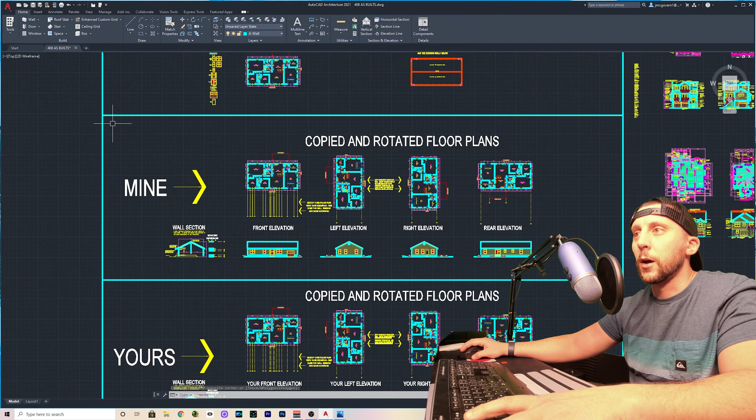All right, so if you guys want to use this file, it's in the link description. What I'm going to do is move all my stuff out. So I'm just going to select all this stuff, hit enter, click anywhere, and move it all the way out here. I could delete it, but I like to steal stuff from it.

For example, and by the way, I'm doing this in AutoCAD Architecture 2021, but you could be in AutoCAD 2021, any year, or AutoCAD Architecture any year, but I'm in 2021. There are a couple differences between 21 and like 20 and anything newer, so as I'm going along, I will talk about that.

But what I meant to say is you don't need to be in AutoCAD Architecture, you could do this in AutoCAD. You just won't have the walls, windows, and door tool. But you can use lines for this stuff, and I'll explain a little bit of that as I'm going on as well.

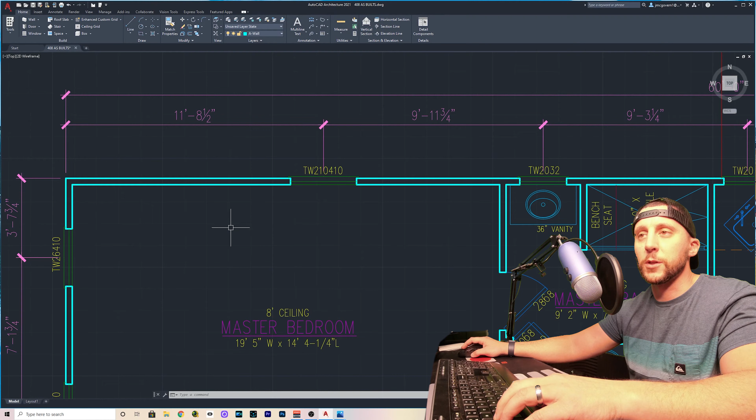So if you're in AutoCAD Architecture, you're going to select any other wall that's in my file, or if you don't have my file, you could just use the wall tool, and you can change the thickness of the wall to be 3.5 inches, because that's the true size of a 2x4. But I'm going to select one of my walls, and I'm going to do add selected.

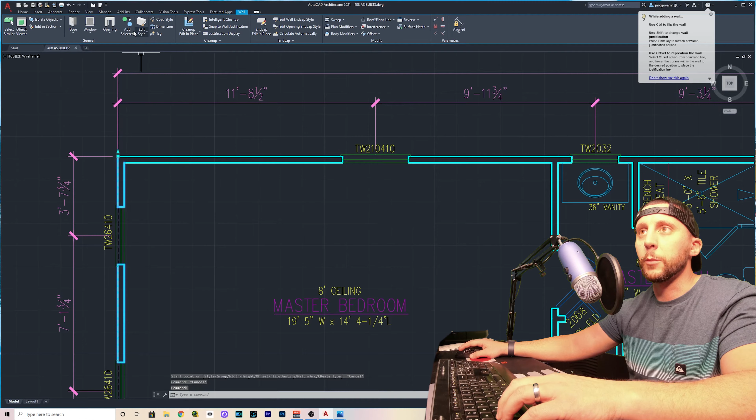With drawing walls, I want to talk about something I've talked about in other videos, but just in case someone new is coming into this, I want to explain this real quick. You can see on my cursor it says justify left, and what that means is that when I click down on the wall, the justification corner being left, if I'm drawing clockwise, is what I want.

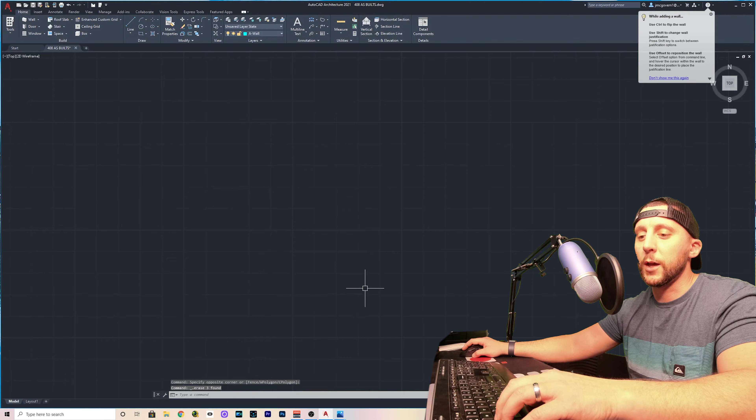If you're drawing counterclockwise, then you want to change the justification to right. The way that you change it is by hitting shift. Let me do that again real quick.

Let me grab a wall. I'm actually going to copy it over so I don't have to keep going back over. All right, so now if you click a wall and do add selected, I'm on left because I like to work around this way.

Whether you're doing my project or your own, you're going to type the distance of how far each bump in and out was on your house. So if you're creating your own plans, you might have 20 feet across, then 10 feet in, then 15 feet out, and 10 feet over.

You want to do those all clockwise, using a left justification. If you do counterclockwise, do right justification. So if I hit shift, it goes to center. Center is worthless. If I hit shift again, it goes to right. So make sure that you're on left if you're following the way that I'm doing it.

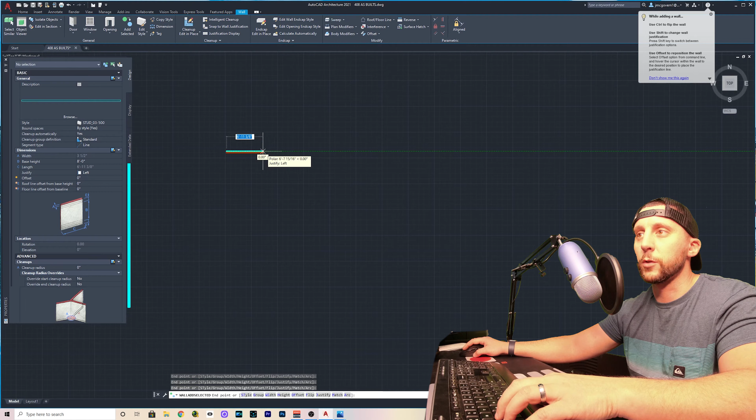Looking at my plan, I'm going to put this up in the video right now as well, but I'll also flash it up every once in a while as I'm looking at stuff.

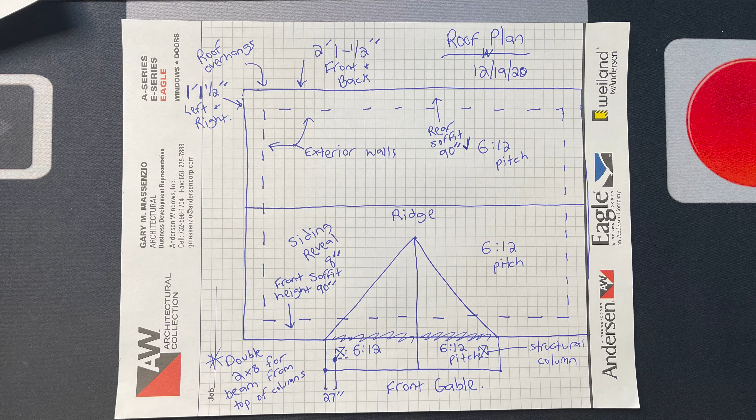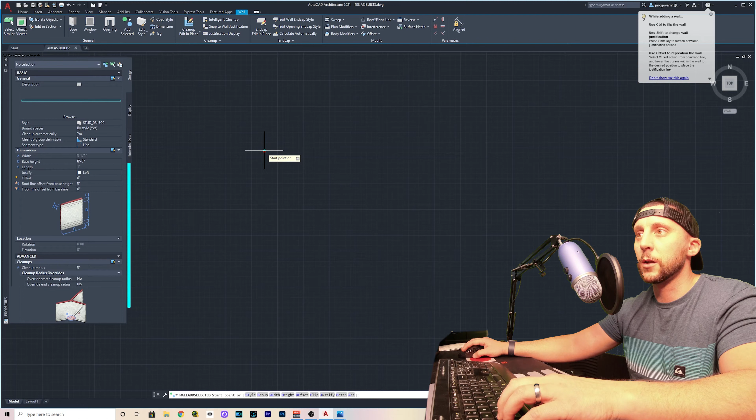So with the wall tool selected, with the wall selected and add selected, you can click down and you're going to go 54 feet, and you put an apostrophe there for feet. And then you're going to go down and we're going to do 26 feet 1.

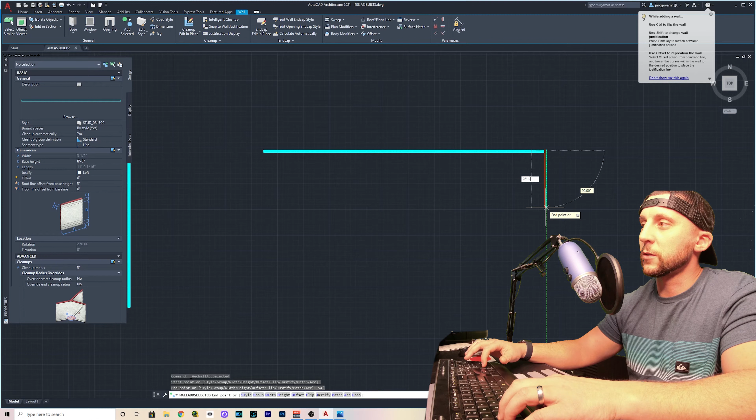Now, if you had a mixed number, like it was 26 feet 1 and 1/2, you would, every time you say the word 'and', put a minus sign. So 26 feet 1 and 1/2 would be 26 feet 1 dash 1/2 inches. But for me, it's just 26 feet 1, enter.

And then we're going to go back this way, 54 feet. And then we're going to do C, enter, for close.

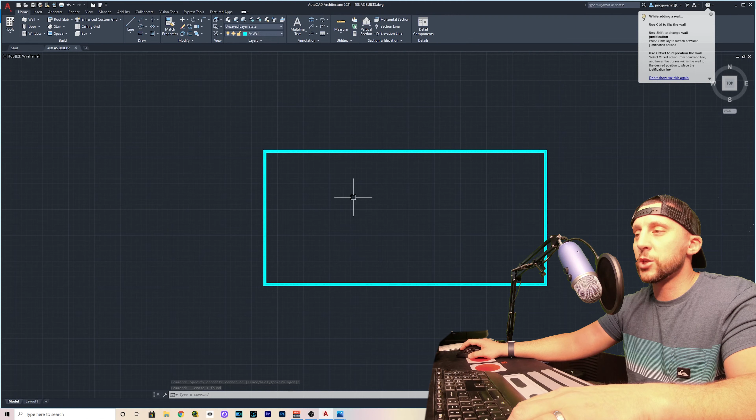Okay, now I can get rid of this wall. I'm not going to do any doors, any windows, any rooms, any kitchen or anything like that in this video. We're just going to do the exterior stuff that we measured.

If you didn't see part 1, I'm going to put a link in my description. You should really watch that first, because that was about how to actually measure your house and what to write down and what to look out for, and the general process of doing the exterior measurements of a house. Now we're just drawing up the exterior of the house before the next video where we measure the interior. And then after that, we'll draw up the interior of the house.

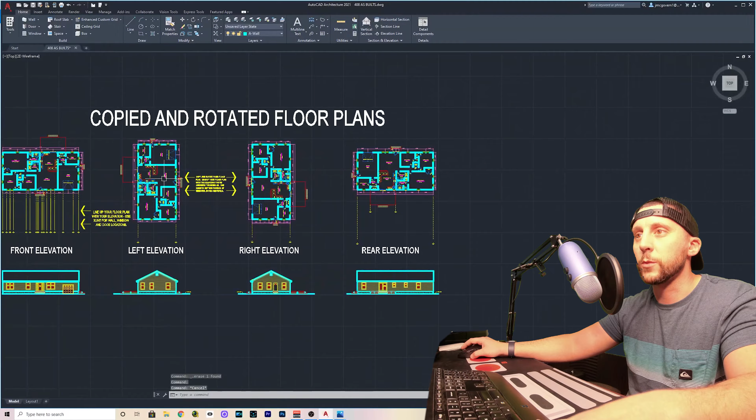Okay, so we're doing floor plans only right now. All right, so the next thing you're going to do is go over to one of these other ones again, and just grab something that's yellow, although that one's upside down. So let's go over here, grab something that's yellow, because that's my note layer. The reason why they all have different colors is because they're all on different layers.

Right now you can see I'm on the wall layer, and I have a lot of layers. A lot of these don't matter for any reason, but we want to be on the yellow layer here, the A text layer. So now you could go into this list and just click on A text, or you could use the tool called Make Objects Layer Current. So if you click on that, you can just click on yellow, and it's going to kick you into that layer.

Everything that I note up, that's like here's where the AC is, here's where the electricity comes into the house. Anything that you're drawing up that's just a note is going to be in yellow. Okay, so here's what we're going to do.

We're going to start, and I realized that on my plan here, I have this backwards. My text is drawn this way so I could read it, but I really want the garage door to face down in my AutoCAD drawing, which will help later when we do elevations. So I could rotate this, but then it's going to be hard to read the text.

In the bottom right corner of AutoCAD, I'm going to do 3 feet 4.5 inches to get to the center of the natural gas.

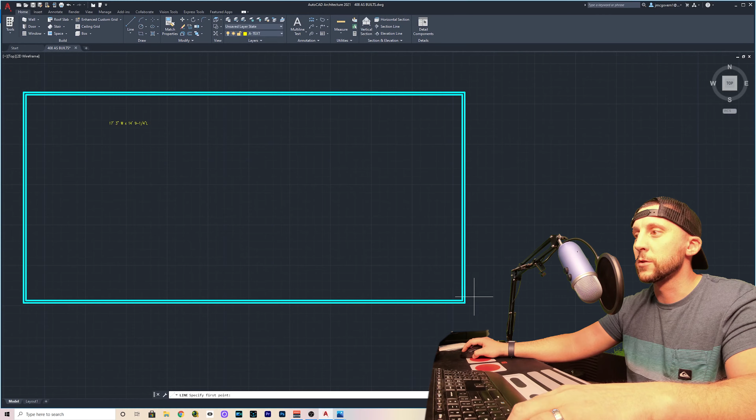You got a couple options here. You could draw a line, let's go like 12. Then you could take this and do M, enter, grab it at the end point, and move it in by 3 feet 4.5 inches, and hit enter. Let's double check that measurement, 3 feet 4.5, good. That's the middle of the natural gas.

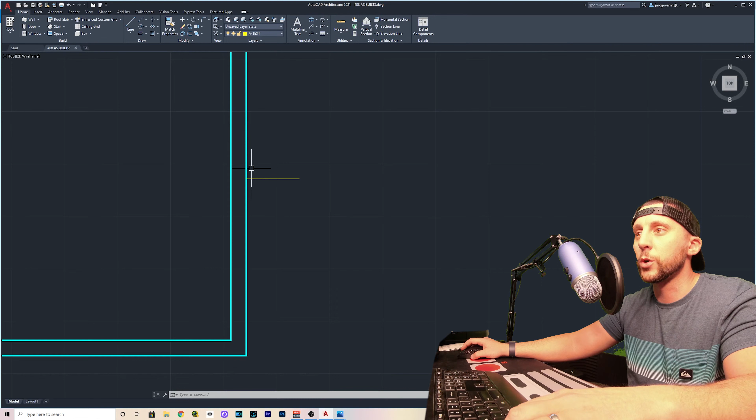Now we're not going to draw a block of natural gas or something that looks like a natural gas inlet. We're just going to put a little box here and label it natural gas.

So do an offset, 6 inches. If you're in the web app doing this, which is a lot more difficult especially for a project of this size, when you do offset you're actually going to click the line first, then go in the direction you want, type your distance, then hit enter. If you're in AutoCAD software, it's just offset, type the distance, hit enter, then move in the direction you want and click it down in that direction.

So I'm going to make this 12 by 12, and I'm going to get rid of my middle line. All I did there was take a line at the end and connect from here to here.

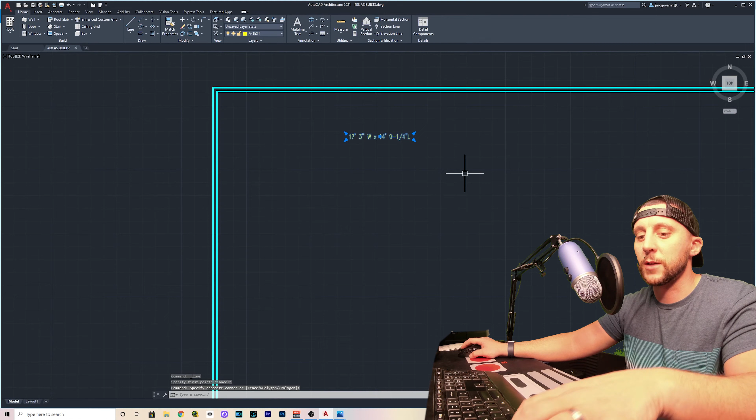Now with my text, this text size is already a good size, so I'm just going to double click in that text. I just copied that one - I did C, enter, click down, then moved it, click down for the base point and moved it over. But I'm going to change this to say natural gas, all caps. Then I'm going to click off.

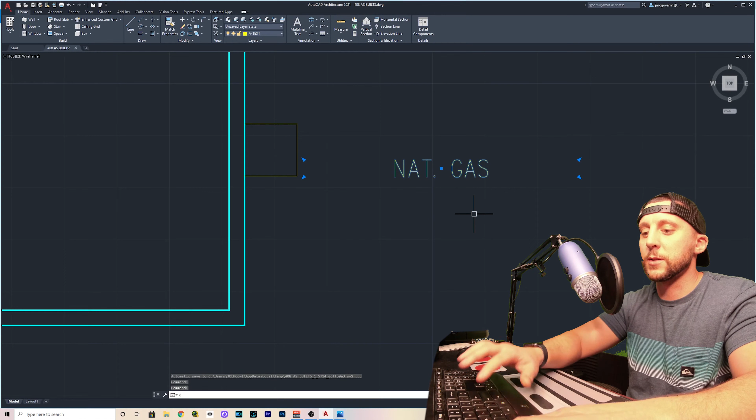I'm going to click it again and type rotate. Then it's asking to specify the base point. You can click anywhere in here and move your cursor up, or you could type 90 and hit enter. Then I'm just going to do M, enter, and click anywhere and move that right by there. I also like to put a little X in there saying, hey, there's something here.

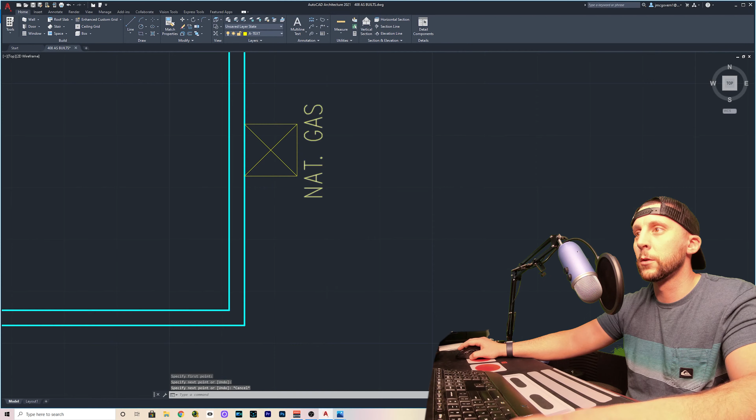All right, so that's the first one. The next one is going to be the electrical panel, and we're going to do the same thing - a 12 by 12 box. Then we're going to do the same thing for the cable lines, which is just going to be a 12 by 12 box.

Now these things are not that size, especially the cable lines going into the house, but it's easier to read on a plan, because you have to remember, if this was printed out at the correct scale, it's going to be on a 24 by 36 piece of paper, and we want it to be big enough to see.

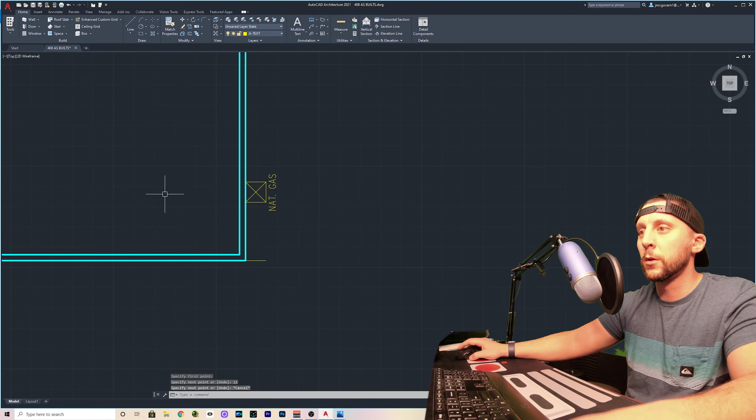So here we go, we got 21 feet 1.5. I'm going to go like this again and just do 12. Then I'm going to take this and do M, enter, and go to the end point and move up 21 feet 1.5 - I think it was 1.5. Did I make that up? 21 feet 1.5, yeah. My brain is a little foggy today, so you guys got to be patient with me.

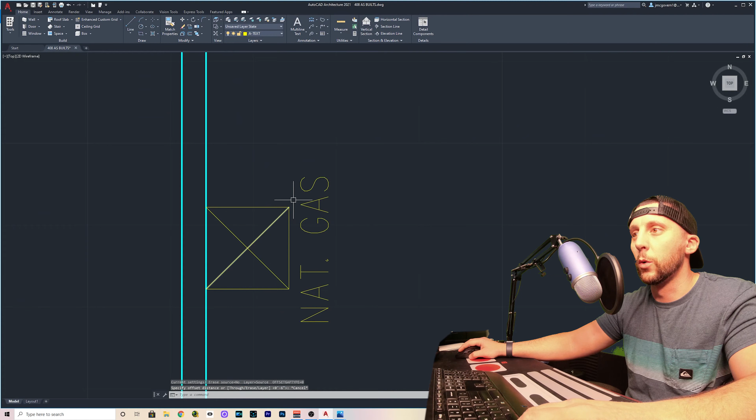Then same thing - we could do the offsets and build all that stuff again, or we could just steal this one, copy it from here at that midpoint, go down on the midpoint, then erase the line. All right, so we got that one. We could have copied this text all in the same shot too, but we'll do it again. Control C is copy, Control V is paste.

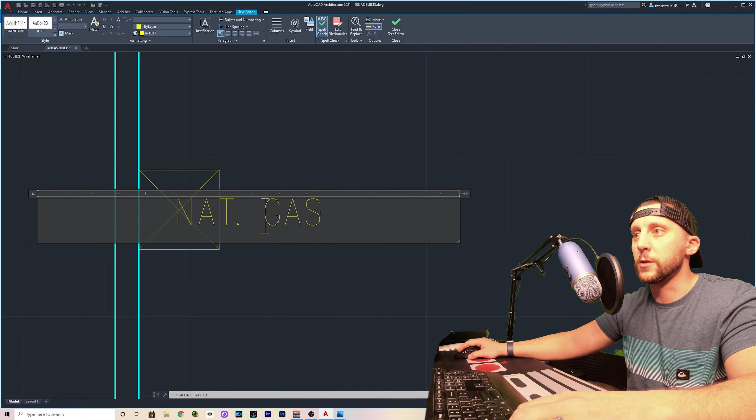By the way, I'm just zooming in and out with the scroller. Wherever your cursor is, that's where it's going to zoom in and out to. Double click on the text, change that to say electric.

All right, now same thing again. I'm going to draw another line out, and it's going to be 12, enter. And then I'm going to move this. Now my measurement on my paper is actually wrong. Well, it's not wrong, they're right next to each other, but they're almost too close to each other.

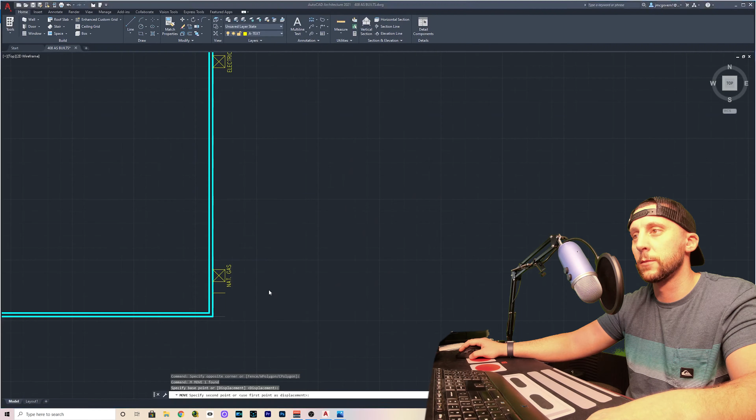So let's see what this looks like when I draw it out. It's supposed to be 22 feet 6. Now you can see how close they are to each other. And if they're touching each other, I'm just going to slide it over by a couple inches. It really doesn't matter, it's just got to be close.

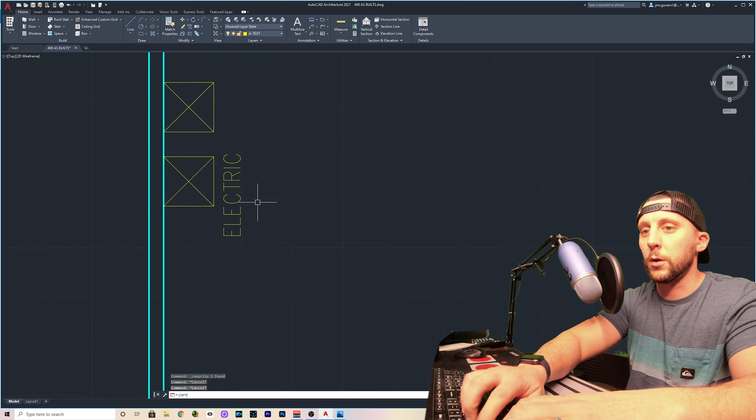Copy, midpoint. That's actually fine right where it is, I'm okay with that. All right, I thought they were going to be on top of each other. This one, I'll just move that down a little bit. And then this one, I'm going to do copy, click the text, hit enter, click down, and then slide that, make that say cable. All right, so we're good there.

That side's done. The back side of the house has the AC, and then it's got a patio. There is a pool and a shed, but I'm not going to do that on this plan because honestly, it's just drawing a big circle wherever the center of the pool is, and it's drawing another box with walls just like we did with the house. So I don't think it's really that valuable to show in a video.

And I'm going to get rid of this too. And then in the front of the house, we got to do the where the poles are, the columns. And I think that's going to be it for the video. I'm sorry, we're going to do a roof plan too, which is pretty easy to do.

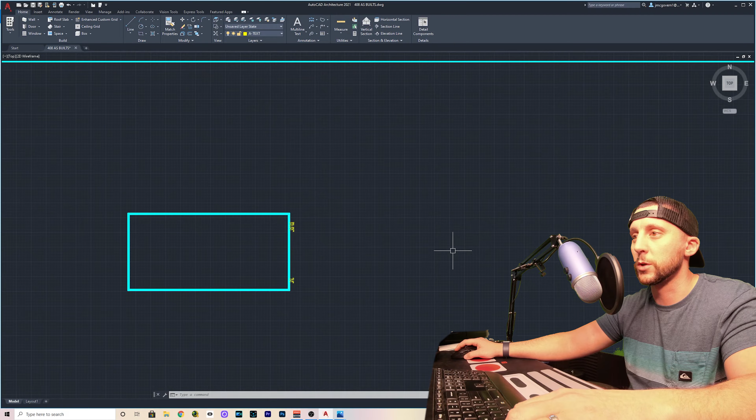So here we go with the AC, okay? I'm going to draw, this time I'm going to do 24 inches because the AC is a little bit bigger than those other things. The AC, whoops, wrong plan. The AC is 3 feet 9 from the corner to the center.

Now remember, when I was measuring all this stuff, I already took off 2.5 inches for any time I measured from a corner of the siding. If I measured from corner to corner, I took off 5 inches because 2.5 on both sides. That's because the siding overhangs the walls by a couple inches. It actually overhangs on my house by 2.5 inches. So I already did all that math on here. So all these numbers are good to go, which means that I'm going to go 3 feet 9 over.

Move, enter, click on this point, slide it over. We're going to go 3 feet 9, enter. And then we're going to do our offsets. And this one we're going to make 24 by 24. And then we're going to move it away from the house a little bit. So 12 this way, 12 that way. Connect the line, get rid of this line.

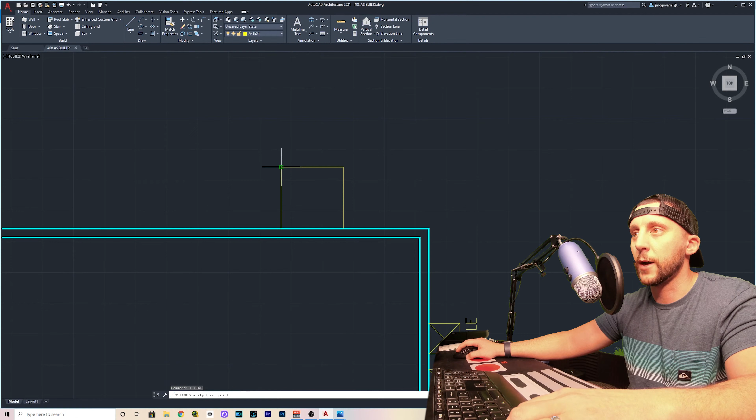L, enter is line if you want to do it faster. Corner to corner. Space, space. Space gets me out of it. Space gets me back into it. Corner to corner, and then we're going to just take this, move it up by about 4 inches, connect the bottom, take our text.

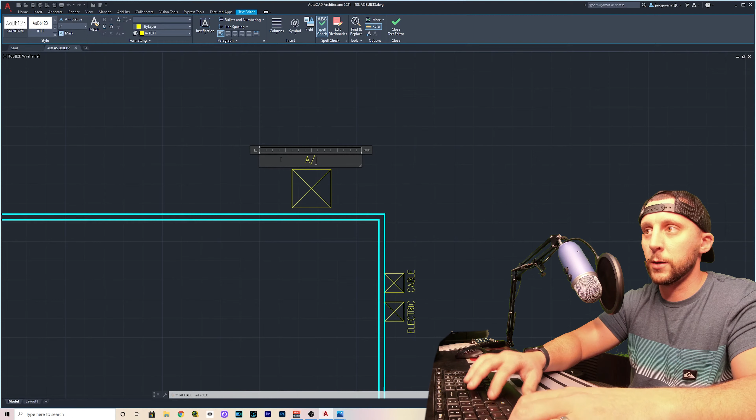I just did a Control C, a Control V, rotate, click down. You can just move your cursor down in the down direction and click, put that where you want it, double click A/C. All right, so that part's done.

So that's all the things I'm going to note up in yellow on the outside. The next thing I'm going to do is going to be the patio in the back, okay? From the back right corner, okay? Actually, in the AutoCAD, it's going to be the back left corner.

It's going to be 23 feet 10 to where it starts. All right, so what I'm going to do is go over to my other plan here and click on this deck.

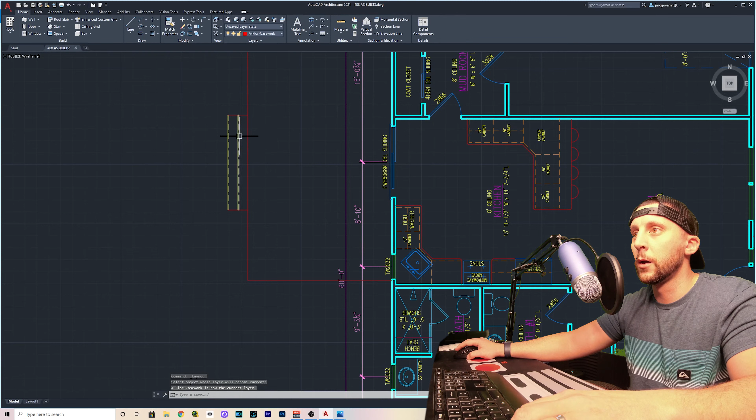Before I do that, I'm going to make objects layer current again. Click on the deck. I don't have any stairs on my house, but if you do, you can click on these lines for the actual steps. One shows the box of the step, the other shows the overhang of the step. The measurements I told you to take were these lines. When you're done putting those lines in for how big the tread is, offset 1 inch to the side, and that'll give you the overhang.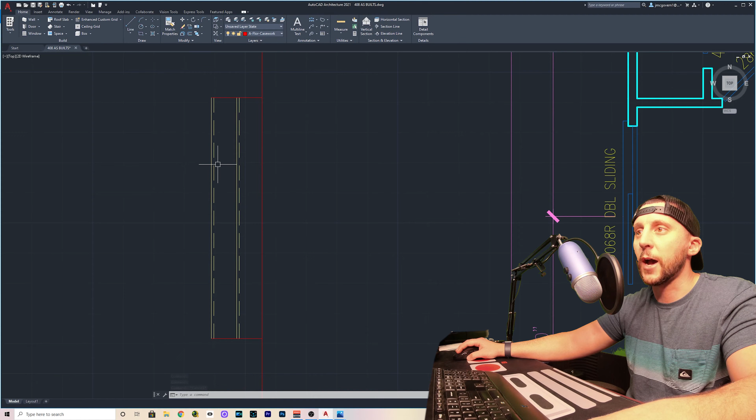For me, I'm on A floor casework now, which is the layer I should just rename to decks and patio, but whatever, I use it for other stuff too, so it's not a big deal. Now I'm on my red layer, and I'm going to do another line here.

Make sure you zoom in because you don't want to get the wrong corner here. I'm going to draw this out 12 feet because that's how far out from the house my patio slab is. Then I'm going to select it, move, grab this point, and move over 23 feet 10. By the way, if you want to know how to shift between windows like that, it's Alt-Tab.

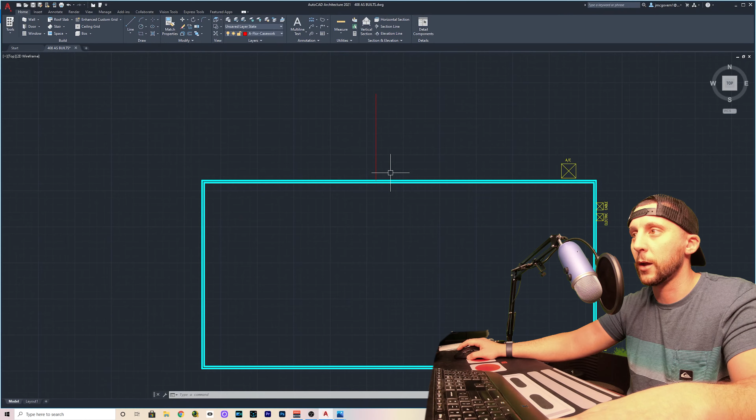I know a lot of people already know that, but some people don't. Alt-Tab just brings you back to the most recent thing you had open. It's a lot faster when you're doing work like this.

Next, off of this, I'm going to draw a line 24 feet because that's how big the patio is. Then I'm going to draw a line and close right there. I'm not going to put an X here, but I am going to label this as a patio.

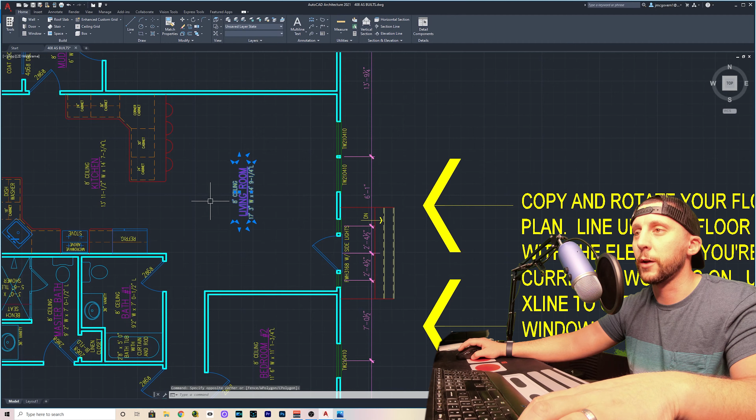I guess I don't have that label on there, so I'm going to steal one of these labels. Just grab those with a green box. By the way, left is green, that selects everything it's touching. Right is blue, that selects only things fully inside of it. So go to the left with a green box, Control C, escape, go back over.

I'm also panning by holding down the scroller on the mouse. If you hold that down and move the mouse, it lets you pan. But there are other ways to pan too, you can just type it. Control V is paste, slap that on there. Take this stuff, type rotate.

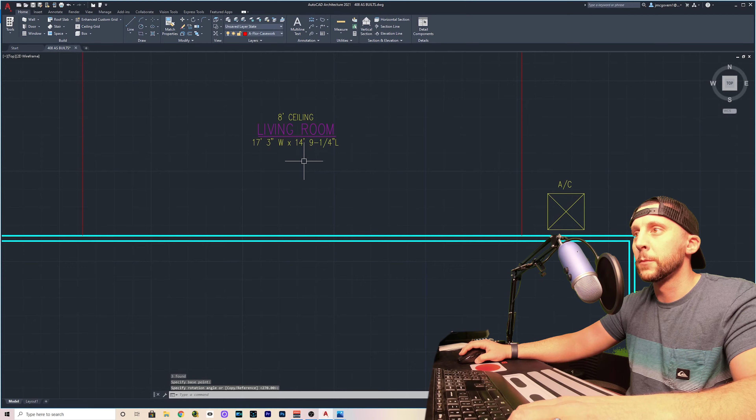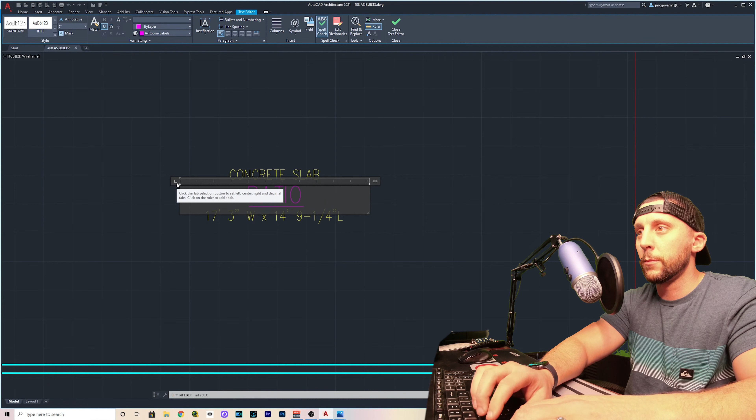Actually, I'm going to double click on this and say concrete slab, just describing what it is. This is going to say... oh, I'm sorry, I'm mixing this up. Let's put patio slab, and then on this one you're just going to say the material, concrete. Now we're going to do the size.

All right, so this is going to be 24 feet wide and 12 feet long, and then click off. All right, so we get something like that. Let's see, that part's done. Now we've got to do...

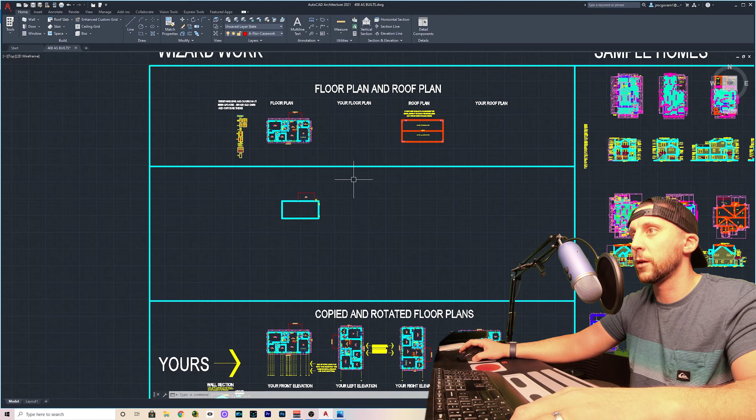We want to do the poles, the columns. They are 6 by 6 and off of this corner, which is the opposite corner of the natural gas, going 21 feet 9.5. Same thing. Actually, that's structural, so that's going to be orange, which is this right here.

So if you see a roof plan somewhere, like this roof plan, it's actually grouped together. If you click on it and type ungroup, it should explode everything apart and give you one of these lines. I just do a Control C, Control V to get one of those over here.

But now I'm going to do a make objects layer current. I'm on my orange, it's called A wall below, which means there's some kind of structural line that goes all the way down to the ground. The one that's A wall above, I would use for, like, top cabinets or something like that, because that's something above you.

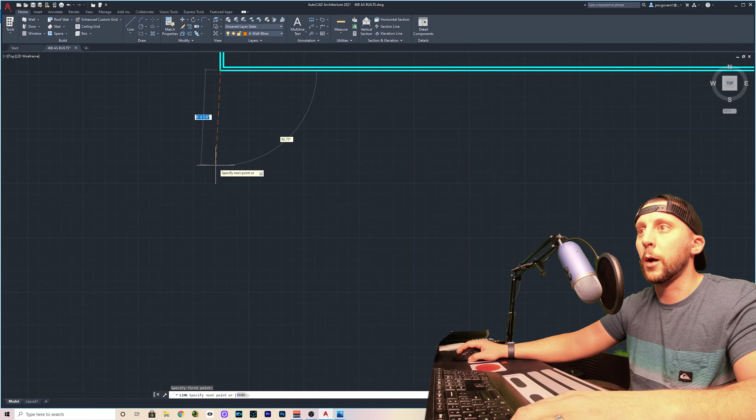All right, so once again my measurement was 21 feet 9.5. I'm going to go here. I didn't pay attention to how far out that was—I think it's actually 3 feet from the house to the exterior of the poles.

So we're going to go 3 feet, and then I'm going to move this over like we've done with the other stuff. 21 feet 9.5 inches—or actually it was 23... 23 feet 9.5, no it wasn't. I'm sorry, my brain is so stupid today. 24, I can't remember numbers. So I just moved that back over 24 inches because I was wrong by 2 feet.

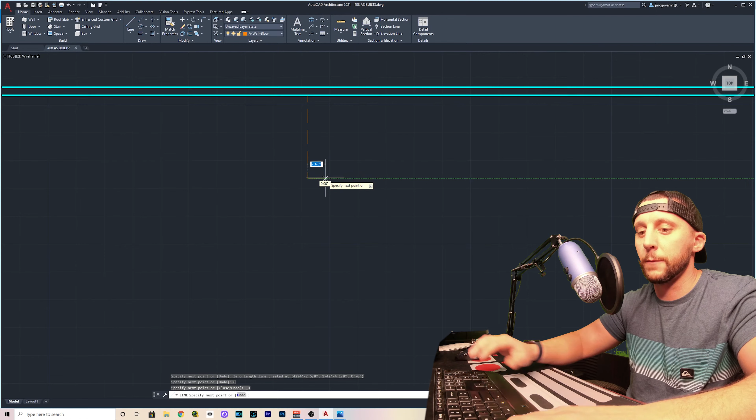All right, so now this is the corner of the exterior of the column. So if you click here and go 6—technically it's 5.5, sorry, it's a 6 by 6 piece of wood but it really measures 5.5. So you're going to go 5.5, 5.5, 5.5, and then close.

And then we can get rid of this. Now, I do have a patio slab in the front too, but it's a sidewalk. You could put that just like we could put the sidewalk going here too, and I would do that in red—that's totally up to you. I don't think it's really that important, and we're not gaining anything out of that here.

But you know, I roughly know that this kind of goes all the way around the outside of the house like that. And then I know I'm actually going to take these and join them, and that's going to make them all one polyline, and then I'm going to offset it by 3 feet, and that's going to be my sidewalk going around.

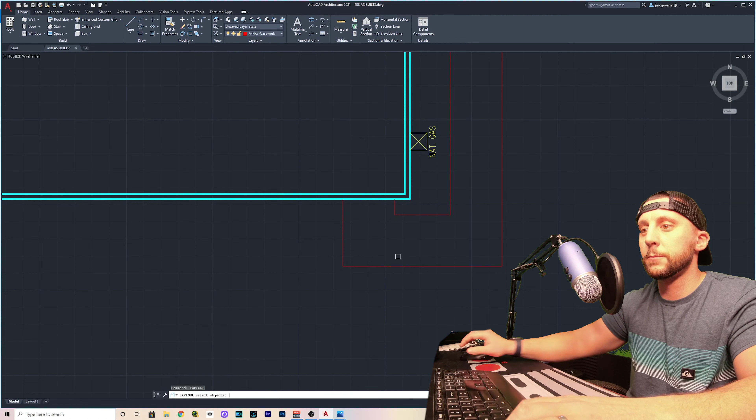Now the sidewalk I'm going to explode now on this one, because that line's not there—this actually is the driveway here. So you could put that too, that's up to you, right? But the point of this was that there's a concrete sidewalk here, roughly about there.

I didn't measure it. I don't think it's important to measure right now because this plan is not getting submitted to anyone. But we can go 3 feet, and then we could come over, and then let's just say my driveway is like, I don't know, 12 feet wide or something.

Honestly, all this stuff—and I said this in the first video too—all of this gets measured by the surveyor, and the surveyor goes out there before any of this work starts, okay? So you can steal that stuff from that document, and that's no problem. But if you want to put it in there, go for it, all right?

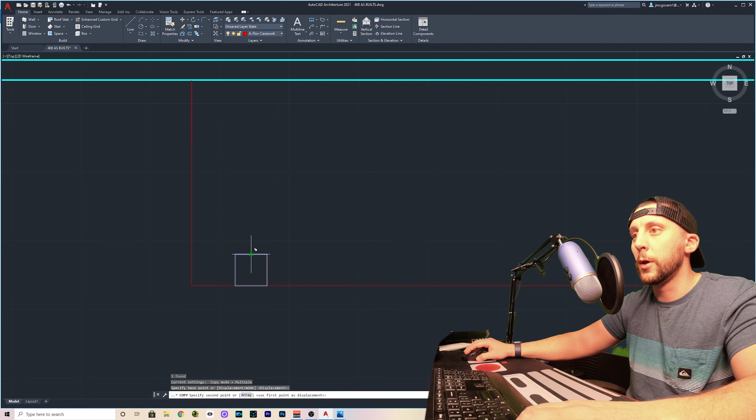Okay, so the other structural column, I'm just going to copy that one, and it's going to go a distance of 17 feet 10 from center to center. So I'm going to go like this, a blue box to select all that stuff, copy, grab it from the midpoint, and you're going to go—see, I forgot that number again, that's really bad—17 feet 10.

Normally I'm pretty good with numbers. All right, so that's it right there. Not showing the door, not showing windows, not showing anything like that.

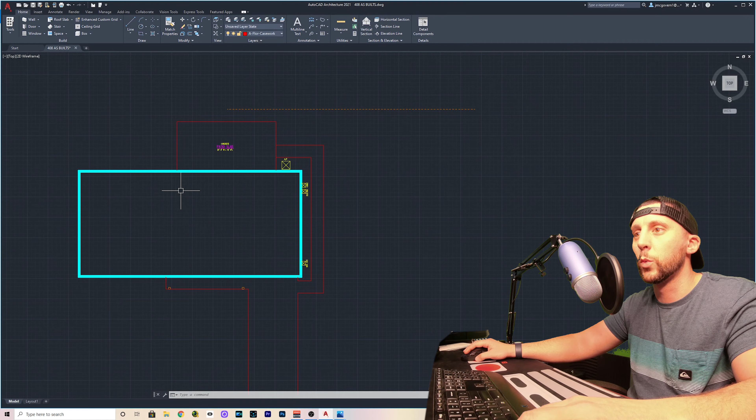So we're good. Now we're going to do the roof plan, okay? That's our exterior plan. We'll build inside of this later and do walls, windows, doors, all that good stuff. This can go. But now we're going to do the roof plan, okay?

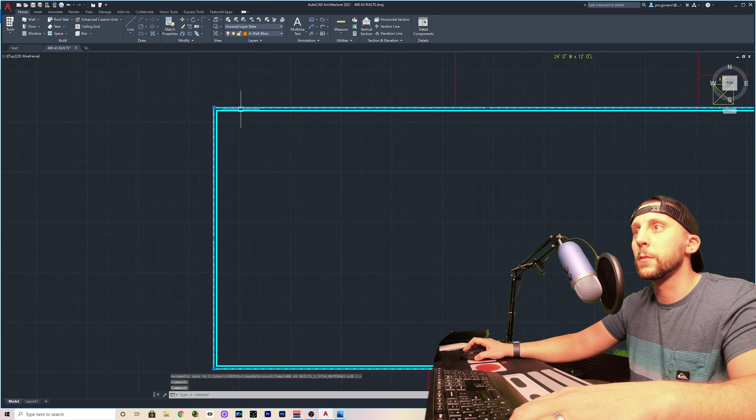So now go back up to this roof plan and do the match objects layer current again, and then you're going to go to polyline, and what you're going to do is trace around the exterior walls of your house. So if it's just these 4 lines because you're doing mine, or if you've got 27 lines because it's in, out, and you've got a really nice fancy house, you're going to trace around, then you're going to do move, click anywhere and just slide that over, and this is going to be our roof plan, okay?

Important to note that we had overhangs, all right? So there are overhangs on all 4 sides. I'm done with this document. I'm going to close this one.

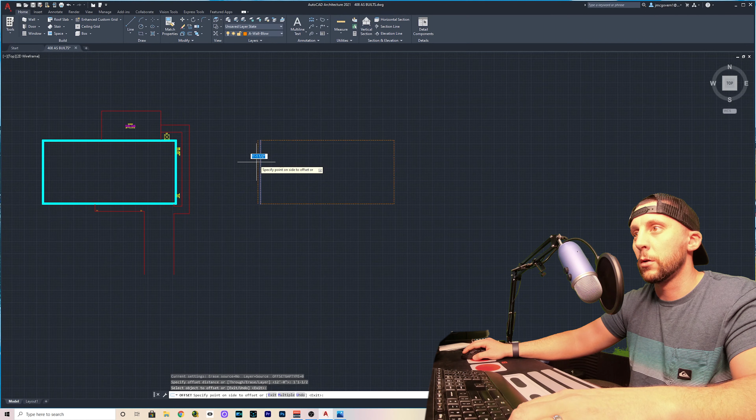There are overhangs on all 4 sides, and I have 1 foot 1.5 inches on the sides. I'm going to take this and explode it, and offset 1 foot 1.5 inches on the left and right, going out. Then I'll measure on the front and back. By the way, keep this document because we'll need it later for the elevations.

We got the front soffit height, the back soffit height, the pitch, all that good stuff. On the back it's 2 feet 1.5 inches, and it was the same on the front. So 2 feet 1 and a half.

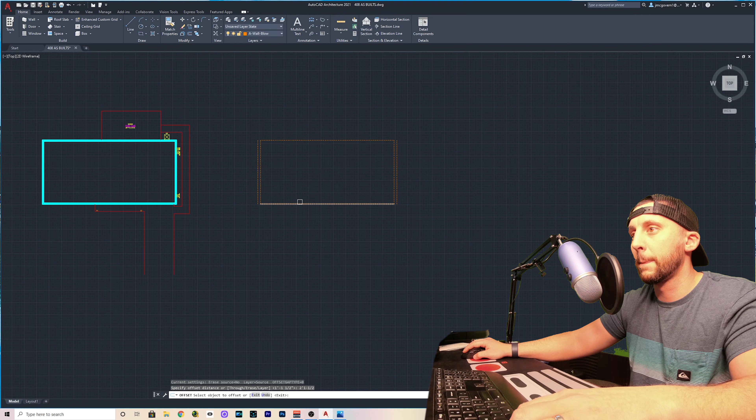Now fillet, radius 0, that just makes a corner. Click, click, spacebar brings me back in. Click, click, spacebar. You could also hit multiple, and then you don't have to do spacebar.

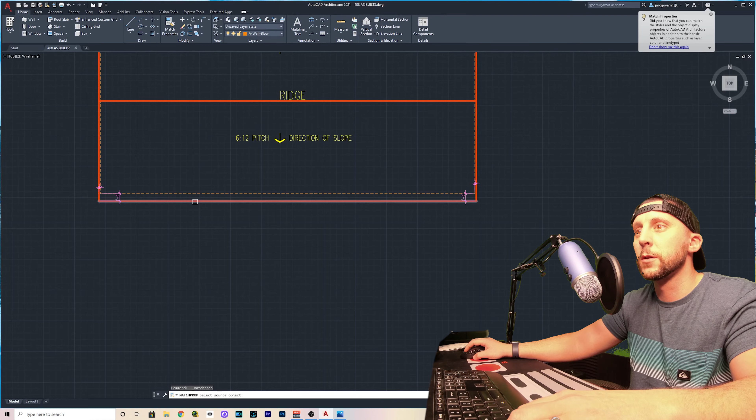Now we're going to go back over here and do match properties. Click the red, because that's my roof layer, and then click on 1, 2, 3, 4. Now I'm going to do make objects layer current, and click the red because I've got a couple more things to draw on the roof plan.

I'm going to go midpoint to midpoint, because that's my ridge going down the center, okay? Now, we could steal this text right here.

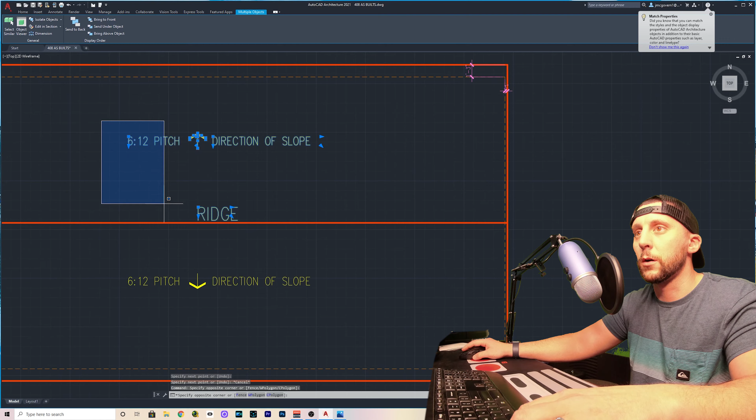Let's steal all of these. Control C, Control V. Change this to say the pitch of your house. Mine is 6-12, so I'm going to leave it. And I put direction of slope with an arrow.

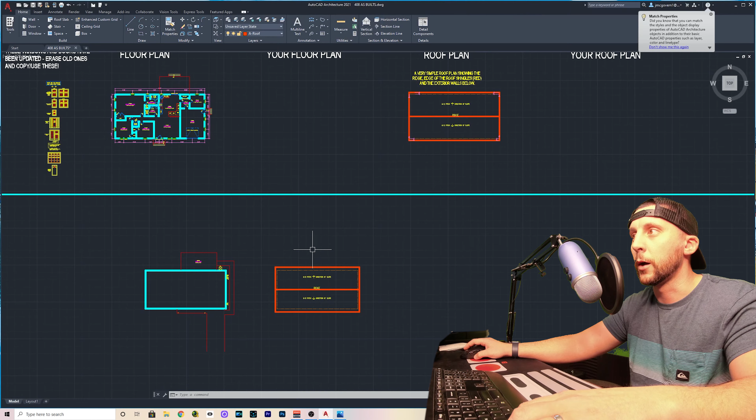I sometimes over detail stuff, but I think it's better to over detail than it is to under detail. All right, so this stuff's good, I'm not going to change anything else there. I'm not going to do dimensions in this one.

We're going to do that later. But you can head over here and grab, all right, so we're going to need this one. This is an open deck below. I'll show you where that goes in a second.

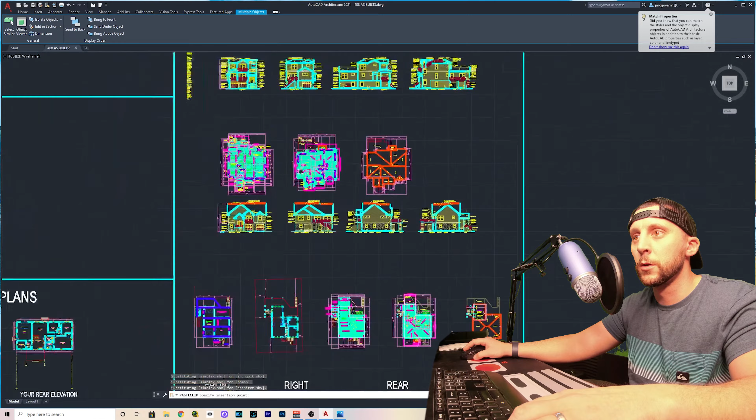And we're going to need, what am I looking for? I don't think it's on this one. All right, so we're going to use that anyways, though. So just grab that, it's definitely on these other ones. See where it says line of structure below? That's the ones you want with 2 arrows, okay?

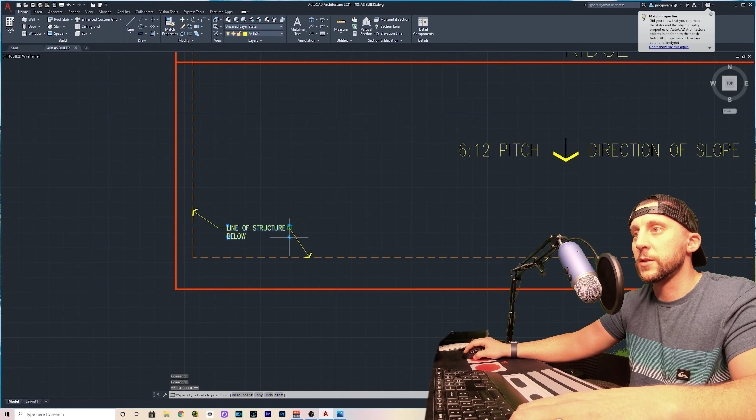So you're going to do a couple things with this. You're going to put one there, and those are going to say line of structure below. Click off, click, grab this arrow, slide that in a little bit, so slide it in a little bit further.

I'm like a super neat freak, so I like things to look nice. That's line of structure below. And then, honestly, I don't want to do that again, so let's just copy it again.

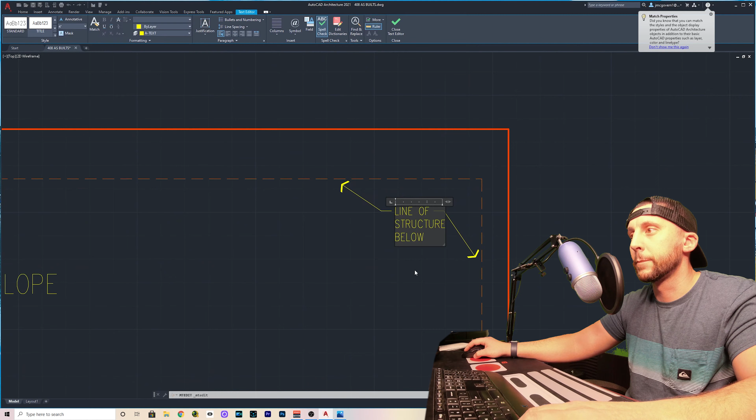All right, so that's good. Now, I should have copied the other one already, but whatever. Slap this out here, okay? Because the roof layer, no matter how many floor plans you have, when you're at the roof and you're drawing that plan, everything that's below it is going to be a different color. It's going to be a light tan, all right?

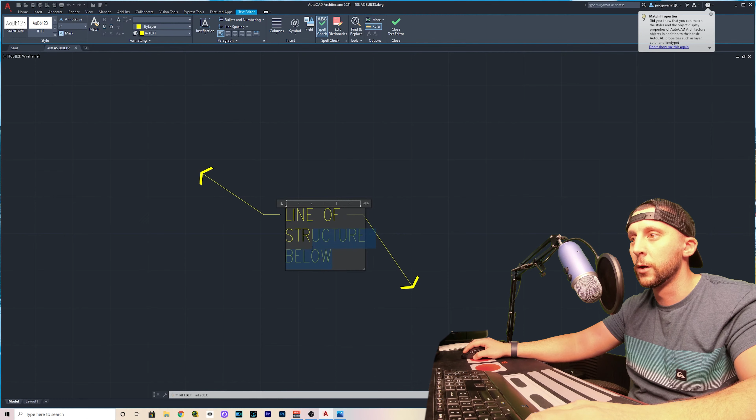So we're going to do that with the patio right now. This is just going to say open patio below. Slide that in, leave that right where it is for now.

And this is actually really easy, you can just select all of these lines. And we actually want the boxes for the columns too.

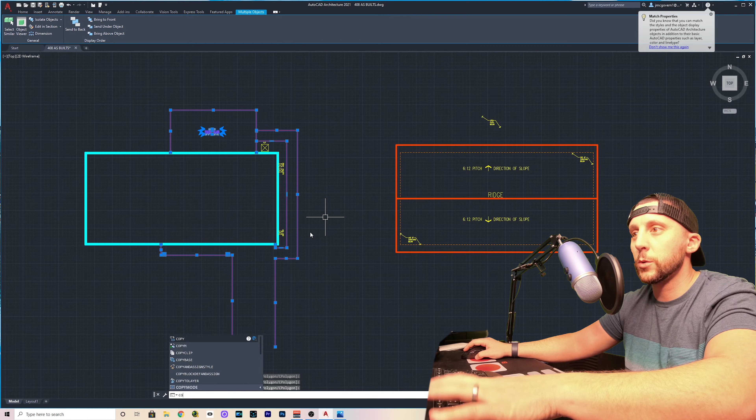And honestly, you could do this other stuff as well, that's up to you. I like to overdo stuff because, for example, we had a set of plans recently that went out and it came back like 3 times. At that point, it was just like, all right, this guy in the town wants everything, so we're just going to put everything.

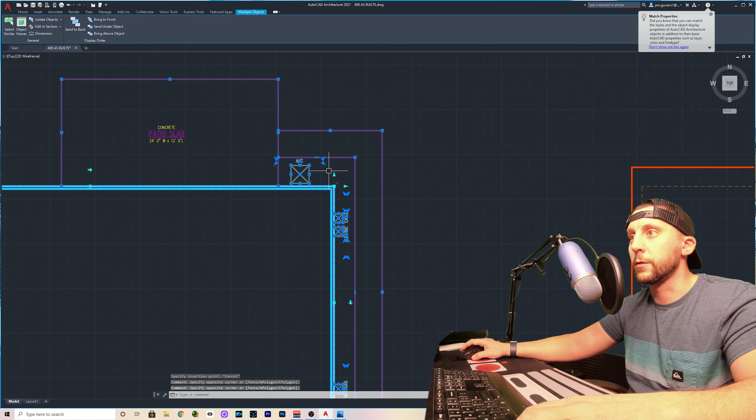So sorry, I just clicked off of that stuff by accident. I'm going to click off my walls.

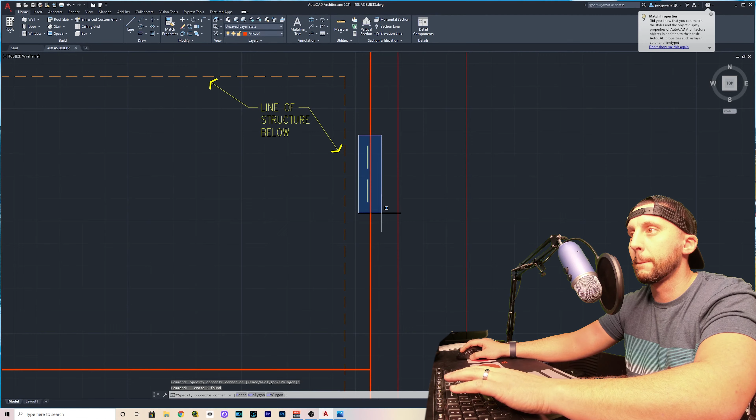Okay, copy. Go off the back left corner and slap that on this left corner. And then you're going to trim where you wouldn't see it. All right, so like this right here, this all gets trimmed. That stuff you're not even going to see, so just get rid of it. It's underneath the overhang, so you just don't see it.

This gets trimmed, that's an extra line, I don't know how that got there. That gets trimmed, and you can get this one out of here too. All right, so we get something like that.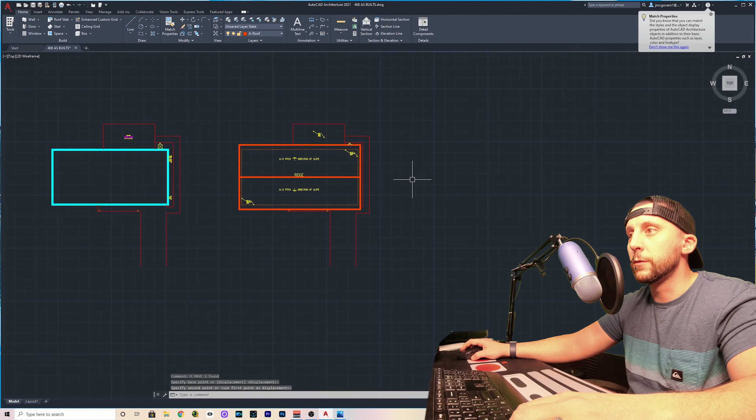Now I was a little off where this was, let's just put that in here. I believe we got two more things to do: the front gable roof, and then we got to go over here. Let's see if I have it already. I don't, because it was a one-story house, and I didn't put a deck on it or anything. All right, let's go over here, to this one, bottom right corner.

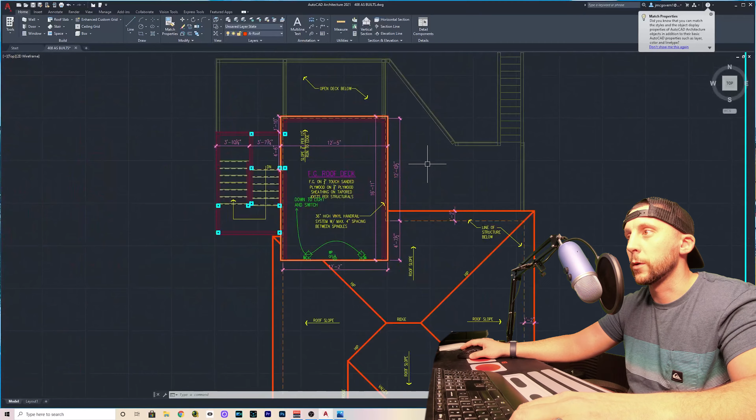We're going to do make objects layer current.

Also, save your work every once in a while. It's doing auto saves in the background, and this was one of my tips in my tips and tricks video, you should watch that if you haven't seen it. But if you go to options here, you can change open and save to save every 2 minutes, so that way if you forget to save, it's still saving in the background every 2 minutes, which is nice.

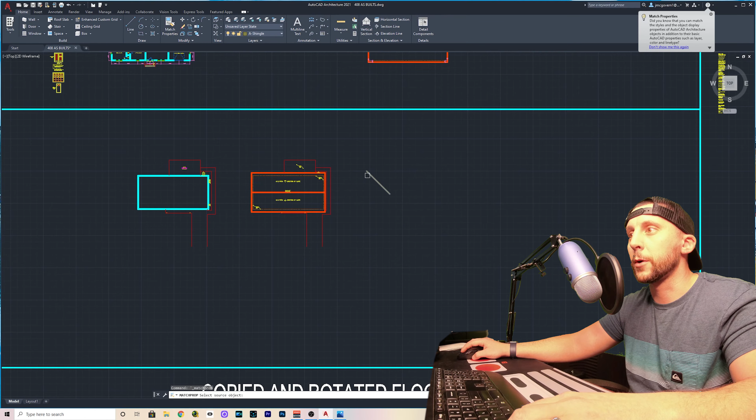Okay, so I'm just going to draw a random line over here, I could have just copied it over, whatever. Match properties, click on the line, and then all this stuff is going to be that tan color, and it's called a shingle. I should really rename that one as well, but it just means that all this stuff is lower.

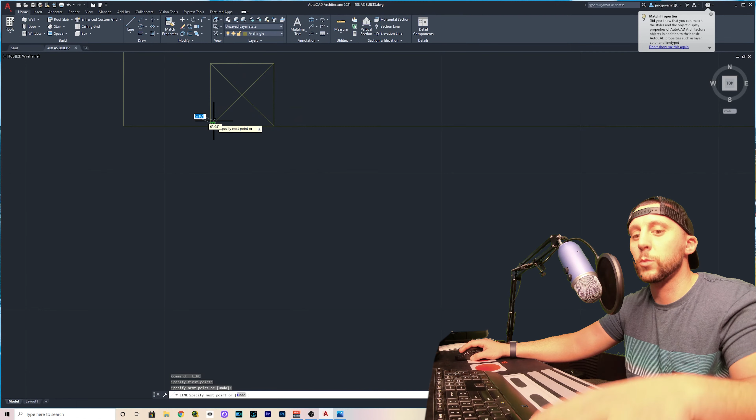By the way, we forgot that we want these, whoops. And we want them here too. Make layer current, line. I feel like I'm disheveled this video, everything is all over the place. I'm really sorry. All right.

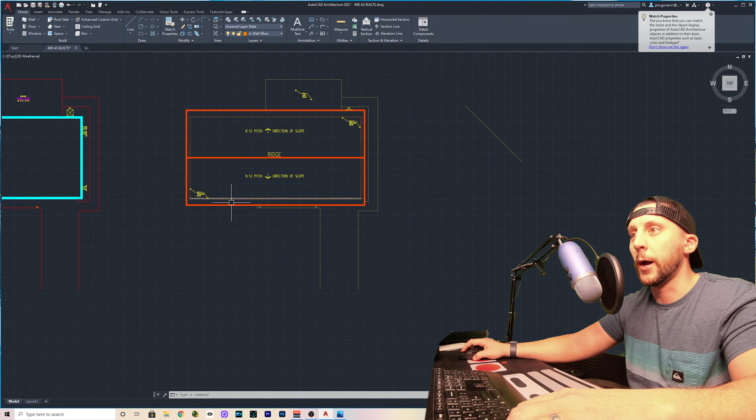Now the big gable roof in the front, I need to find the position of it. It's actually centered on these columns, so I'm going to draw one from here to here. The overhang of it is even with the outside of the columns, so I actually should have just went end to end, but that's not a big deal.

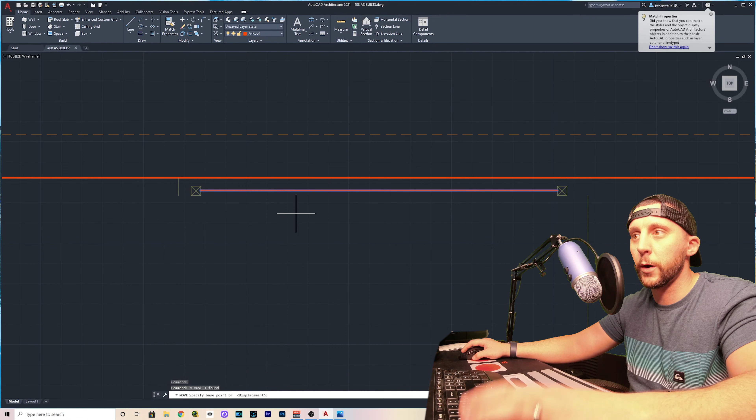Match properties, match this to that, which means that since I'm moving this out of the way by 3 inches, this one doesn't need to be here because you're not going to see it anyways. So let's just trim that out and we'll patch it back up in a second if we need it anywhere, and then move this back 3. This is going to go out this way, and then it's going to go in.

Now, how far does it overhang? That's the next question. It overhangs by 27 inches from the exterior of the column to the exterior of the overhang. So if I go here and go 27, that's how far this line should go. And then get rid of these two.

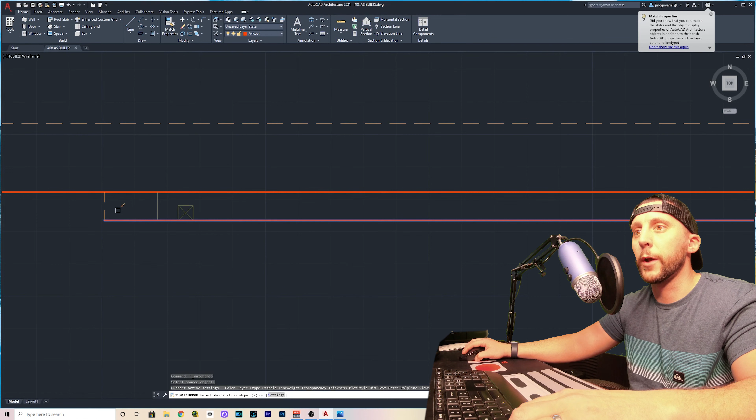Draw that. I should have been on the red layer, but that's okay. Match properties, red, click on that one. All right, same thing over here, we're going to go 27 inches. Just draw a line down.

That way you have something to extend this to. Get rid of this line. Although this line actually does need to be here, you can just draw it like that for now. Get rid of this. All right, so we get something like that.

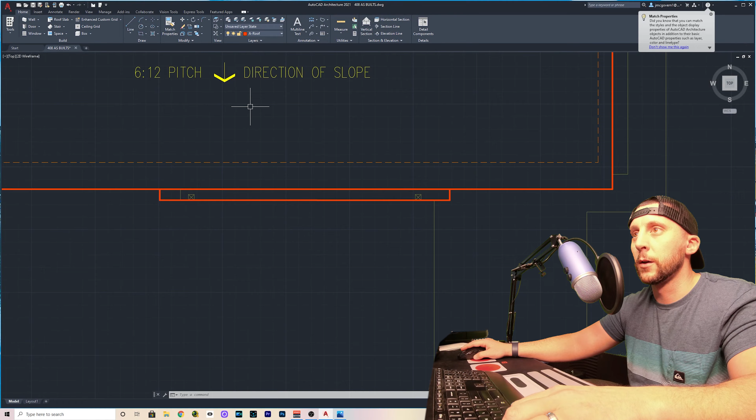Now this overhang goes in, and when it hits this other roof, it starts angling. Because the pitch of this roof here is the same as the pitch here, it's just going to be a 45-degree angle. So click on this end with a red line, do an angle sign, which is shift, comma, then do 45, enter, and this is just going to draw up like that and let it go pretty far. Same thing here, this one's going to be angle 135 because it's 90 plus 45.

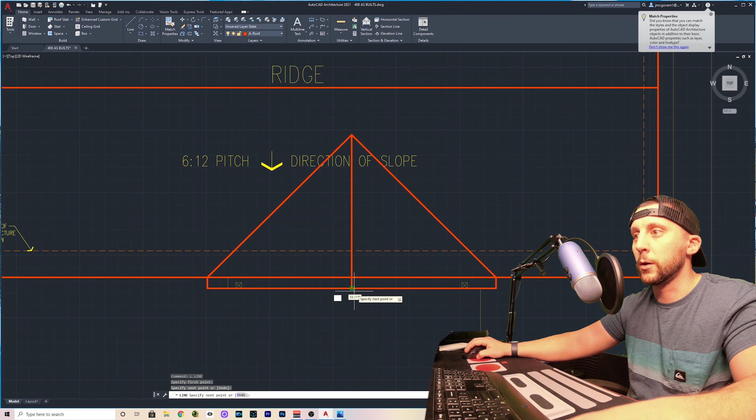And where that hits, you're going to trim and draw a line for the ridge of that one. Then you're going to trim, trim, trim. This line was just left over from something else. And that's it, that's the front roof.